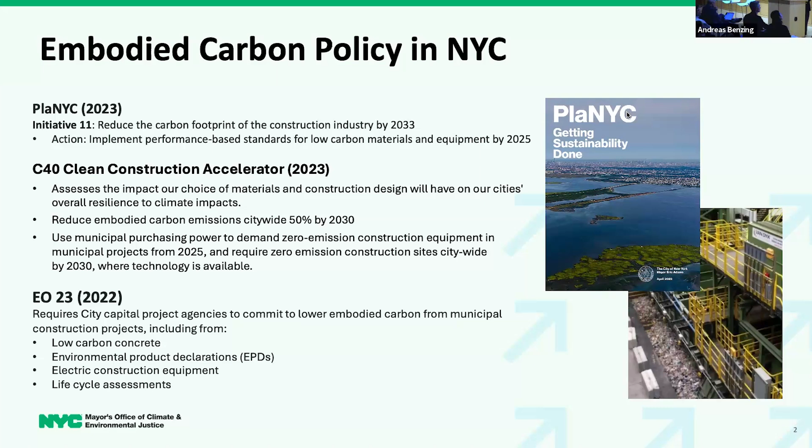Then, sorry to skip around here, but in PlaNYC, the city's strategic climate plan released in April of 2023, we had an initiative to reduce the carbon footprint of the construction industry 50% by 2033, with a specific action embedded within that plan to implement performance-based standards for low carbon materials and equipment by 2025, which is just around the corner. And then finally, I really wanted to highlight, and I'll go on to the next one, the C40 Clean Construction Accelerator.

Some of you in the room may be familiar with C40 and their clean construction program. They've been really helpful with us in capacity building within the city mayor's office side to help us develop North Star goals and how to assess the way our material choice and our construction design will impact our overall resilience to climate impacts.

So I've highlighted a few of the commitments here. There's a whole slew of them, and you can find them all on our website, nyclimate.nyc.gov. But really, it accelerated our commitment as laid out in our strategic climate plan, our 50% reduction in embodied carbon commitment, moving it from 2033 to 2030. And that's very ambitious, and we understand that.

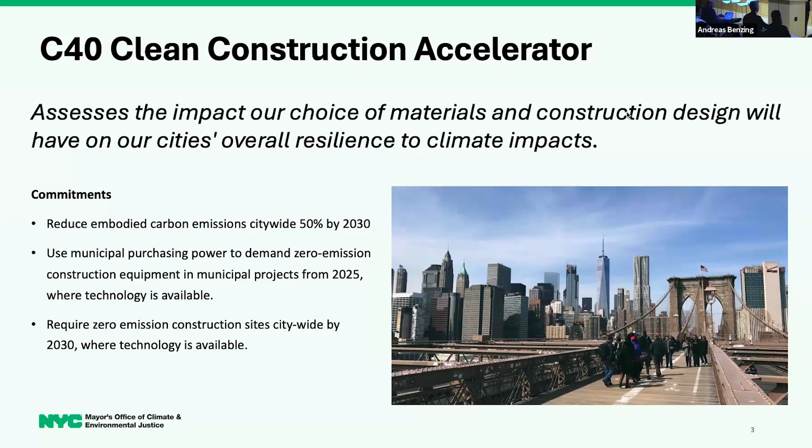Another initiative I wanted to highlight here is the use of municipal purchasing power to demand zero emission construction equipment from 2025 for municipal projects wherever the technology is available. That's something we're also doing research and undertaking this fall. And then finally, on the subject of zero emissions construction sites, we want to try to push to mandate that to be a citywide requirement by 2030, wherever that technology is available as well.

So I'll go through the elements of the executive order bit by bit and where we stand on implementation. For low carbon concrete, we've really seen a shift to performance-based specifications from this kind of prescriptive concrete specification that you traditionally see. We see that as really best practice based on conversations we've had with industry stakeholders.

I want to highlight our Department of Environmental Protection, which just this August released the city's first low carbon concrete specification, which is publicly available if anybody wants to look through it. We know our other city capital agencies are not far behind in releasing their own low carbon concrete specs—DCAS, DDC, Parks, etc. They're really all working on this, and we expect their specifications to be released this fall and winter.

I know there's been a lot of talk of innovations here at this conference. Really the one we see most developed so far in New York City is the use of ground glass pozzolan as a supplementary cementitious material, as opposed to fly ash or slag, which are fossil fuel byproducts. We've been working a lot with our Economic Development Corporation on this, and we have research with Stony Brook University looking at marine applications of ground glass pozzolan in concrete, as New York will need to pour a lot of concrete to become more resilient to coastal flooding from climate change.

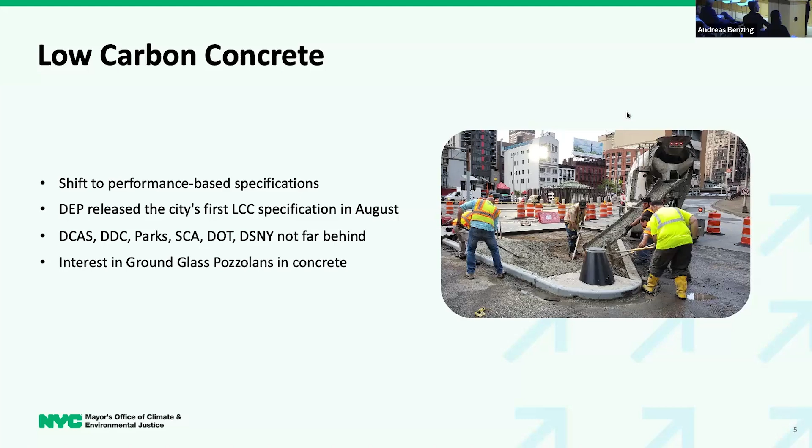Moving on to environmental product declarations, I know these were also mentioned quite a bit today. Our EPD guidance was released in January of this year. We've assigned our applicable projects pretty broadly, letting each agency decide what projects this element of the executive order applies to. So we're saying any construction project awarded by a city agency subject to the executive order using concrete and steel needs to request environmental product declarations wherever possible.

You'll see the covered construction materials here, focusing on both ready mix and precast concrete, which was a recommendation from industry stakeholders to push the envelope beyond ready mix into the precast world. On the steel side, you'll see a whole slew of different steel materials we're looking to gather accurate data on. If an EPD is not available, that's okay, but we want agencies to ask their suppliers why, and help build that capacity from the inside.

We're also encouraging agencies to provide EPDs for other materials not listed here. We know there are robust EPD ecosystems, for example in the finishings industry, but we couldn't necessarily require those just yet. We want to see what EPDs are on the market in New York City and what's being used in capital projects before we require them beyond these two.

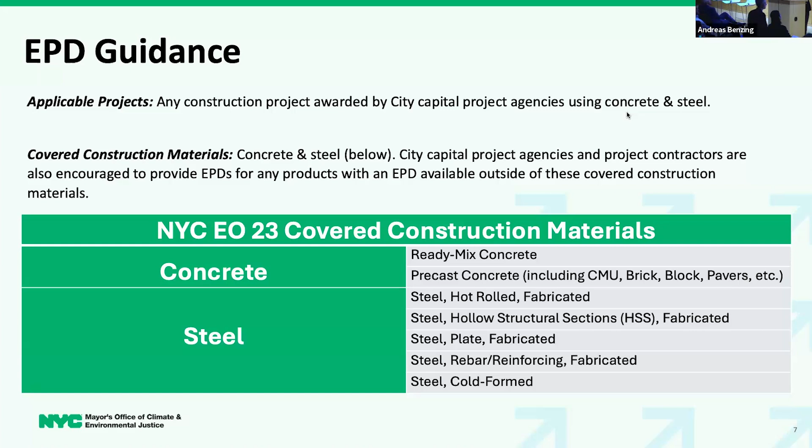Just a quick shout out here—I know Katie Poss from Building Transparency spoke earlier today, but we are using the EC3 tool, and she's been a wonderful help to us in creating capacity within our city capital projects. This is a screenshot of the EC3 tool, which has been helpful to us in developing the data infrastructure we need to further expand our EPD requirement.

We're trying to calculate or cover the quantities of construction materials, understanding whether or not there's an EPD for that specific material. We're linking to the specific EPD so that if we wanted to take a deep dive into a project, we could see it. EC3 also has a wonderful component where there's a how-to-get-an-EPD section that we found could be very helpful.

So if a contractor or agency project manager is interfacing directly with a supplier and they don't have an EPD, they could go to this section within the EC3 tool, giving that contractor or manufacturer the tools they might need to get started on their EPD generation process.

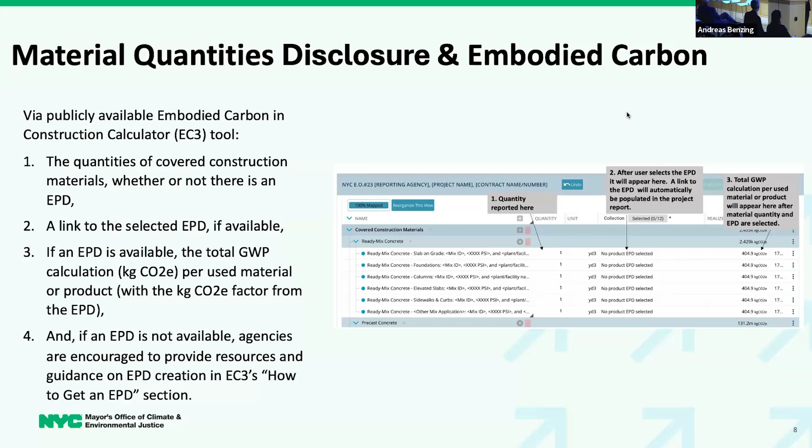This week for our office has been a really big week for electric construction equipment, and I know that might not be the general focus of this conference, but I wanted to highlight this as a challenge for us and something we've really taken on. We know there are significant challenges to getting electric construction equipment on sites here in New York, both newly available equipment and ones that are retrofitted and fit out.

We know that in certain cities around the world—our colleague was in Oslo, Norway just last week—almost 80% of their construction sites are fully electric. There's infrastructure around the world for these pieces of equipment; it just needs significant love and attention in New York. We know there's also cost, both upfront and lifetime cost issues, and a sincere lack of communication between cities, government agencies, and stakeholders within the electric construction equipment community.

So we can't accurately specify electric construction equipment just yet because we don't know what's on the market, and we don't know what's coming over the next year or two.

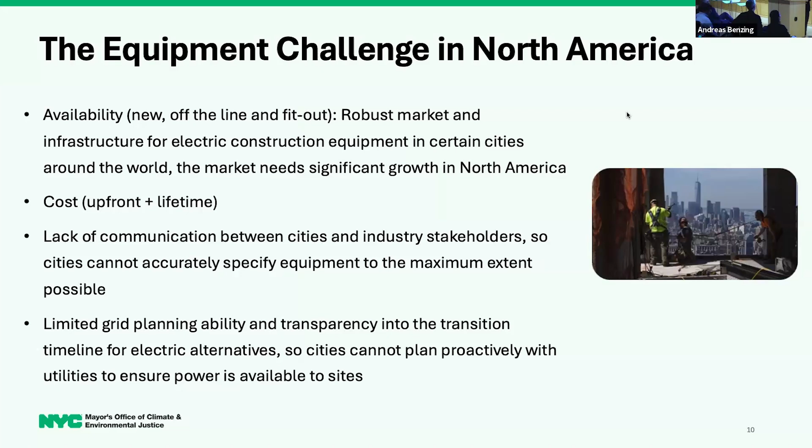So with those challenges in mind, we have just launched the North American Electric Construction Coalition. If any of you are from a New York City-based company or even anywhere else in the States, I really encourage you to check out our website. I regret not having our QR code up here, but please reach out to me after the panel. Together with 6 other cities, New York City is launching this coalition in order to help us spur the market and develop this market in North America. We know that cities, when they work together, have a real ability to drive impact and move markets.

Collectively, as a coalition, I think we spend over $15 billion on capital construction every year. So really hoping that this coalition, and it's by no means closed, but really hoping that this coalition will help start this conversation here in New York. We also have private sector partners a part of this coalition, and you'll find that on our website. But anybody from a private sector firm to an institution to a city, we really encourage you to get on board and start having these conversations with manufacturers as the year goes on.

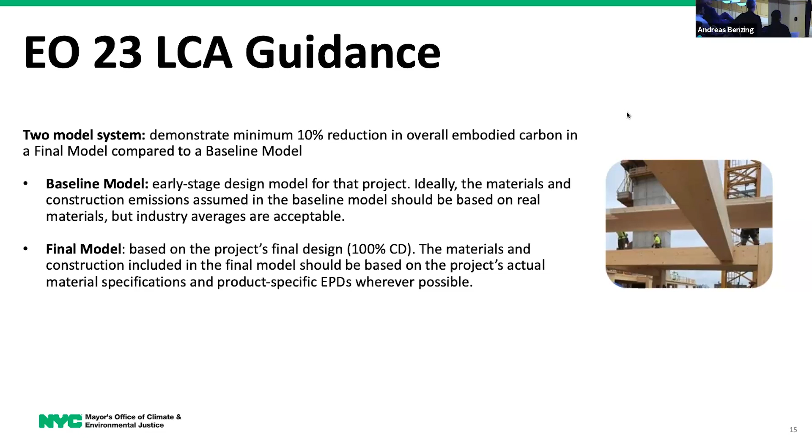And this is what I meant to have before. You can see here, this is a graphic from the Carbon Leadership Forum, but we're targeting this kind of yellow-orange embodied carbon piece here.

We're not looking quite yet at whole life carbon, synergizing the operational standards we have on a city level with the embodied carbon standards we're starting to build out. But we are requiring the upfront carbon stages—A1 to A5, B1 to B5, and C1 to C4. And maybe pertinent to you all in this room is optional reporting on the benefits of biogenic carbon or concrete carbonation in our reporting template.

You'll also find on our website that we took an approach to break apart the life cycle assessment that a tool spits out into its specific components by life cycle phase. By separating out the biogenic carbon piece, we can get a better understanding of the benefit of these biogenic materials so we can make more accurate policy later on. That exercise will be critical for supporting the development of the mass timber industry, and all the other amazing innovations we've heard about today.

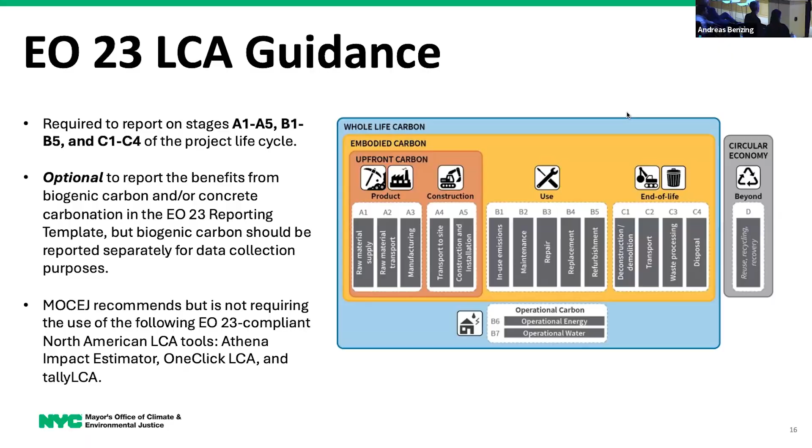We also don't weigh in on which specific LCA tool is better than another, but we know of the tools that cover the A1 to C4 section. The main ones in the North American industry are Athena, OneClick, and Tally. Just wanted to point that out.

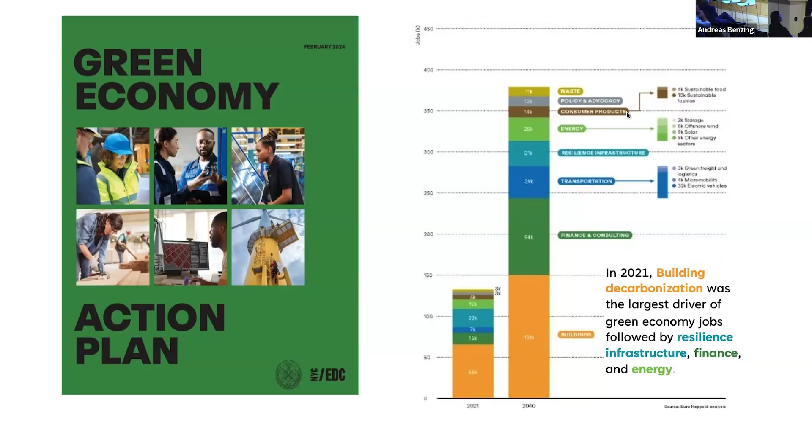To give some quick background—I know a lot of folks here know these facts and figures—operational carbon is something we target through other programs, including 80 by 50, a partnership with New York City DCAS. But with the circular construction guidelines, we're really focusing on embodied carbon, which is 30% of carbon emissions coming from buildings.

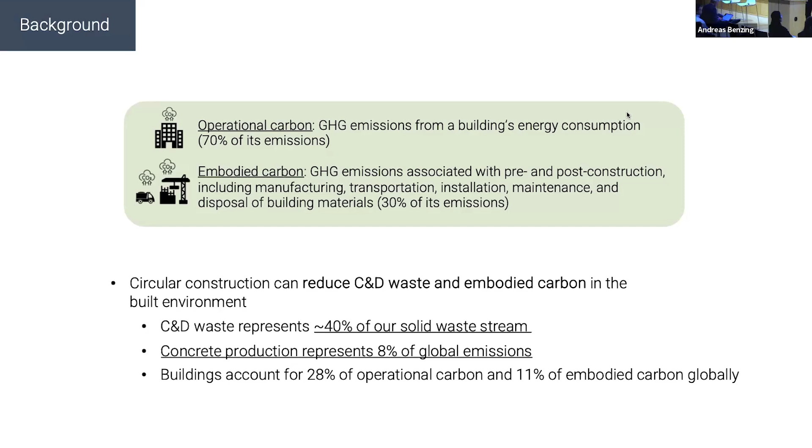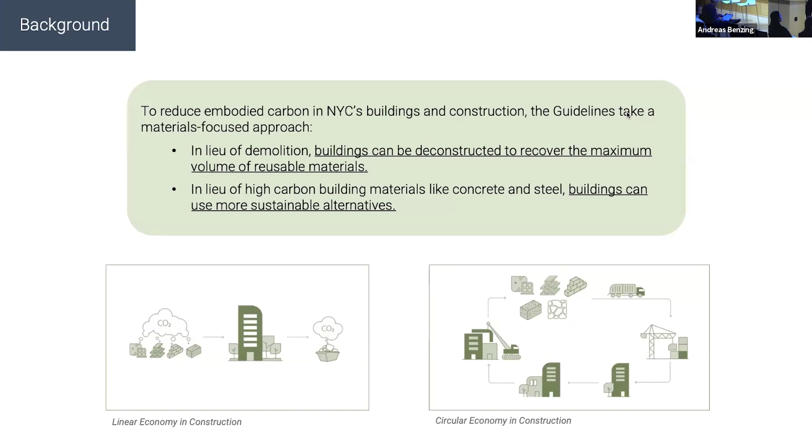I think we're all familiar that construction and demolition waste is a big part of the global solid waste stream, and concrete production and steel production really contribute to that. So our guidelines take a materials-focused approach: in lieu of demolition, deconstructing buildings, and in lieu of high carbon building materials like concrete and steel, buildings can use more sustainable alternatives.

I want to go through a few projects before we jump into the guidelines to show how we led up to this. Red Hook Library, which is under construction right now, is one of our earlier examples. In this project, at the top you can see the existing library, and at the bottom a rendering of how it's going to turn out.

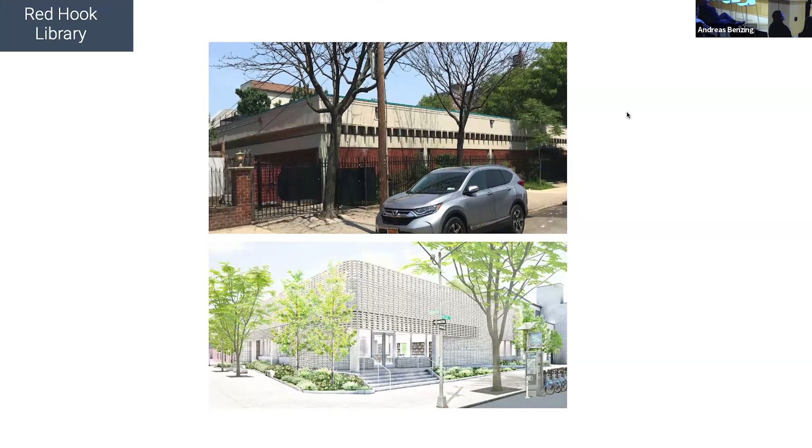We sought to use as much of the concrete structure as possible. This is in Red Hook, which many of us know is in a floodplain, and we had to raise the floor level of the building roughly 18 inches, then have a flood wall beyond that around the building, another 18 inches. So doing that, if you raise it up, you'd have a pretty low space between the roof and the floor. So we had to figure out a way to raise up the roof as well.

I wanted to show this because it's a great lesson learned from trying to implement circularity principles in a project, and that's where you have to find the right contractor. Without Urban Foundations and Engineering, we couldn't have done this. It wouldn't have made sense financially, and it would have been too long to try to figure it out.

Urban had already raised a theater in Times Square 30 feet up in the air, and that theater weighed about 14 million pounds and had 1,700 seats. They had to do that without disturbing any of the delicate plaster work. So this project was a walk in the park for them to raise this double-T concrete roof up roughly 5 feet. That accounted for the roughly 3 feet from the floor and the flood wall, plus some more for our ceiling heights and the new design of the library.

You can see on the top right the large lateral braces with Urban written on them, and the beginning of the jacking process of raising this roof. Then the photo on the bottom, as well as the zoomed-in version, shows where we raised up that roof. They did this really quickly, over the course of about a day and a half.

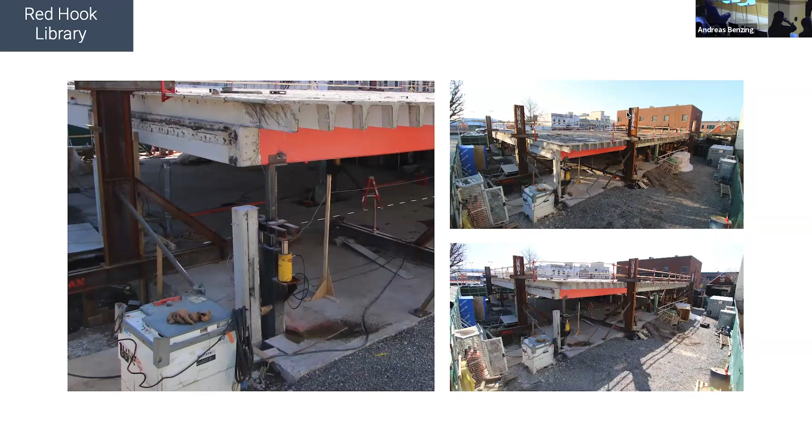Again, the collaboration with the right contractor at the right time was key to this project. Some other folks at EDC are really trying to build up the industry so that we don't have to rely so specifically on this, but at this time, that's really what we're looking for whenever we try to implement these strategies in our projects: find the right one.

This is another one of many projects we have, but these are two kind of fun examples I wanted to show. The Bronx Museum of the Arts is another project where we are redefining the face of this museum along Grand Concourse in the Bronx. This is a side facade over on 165th Street.

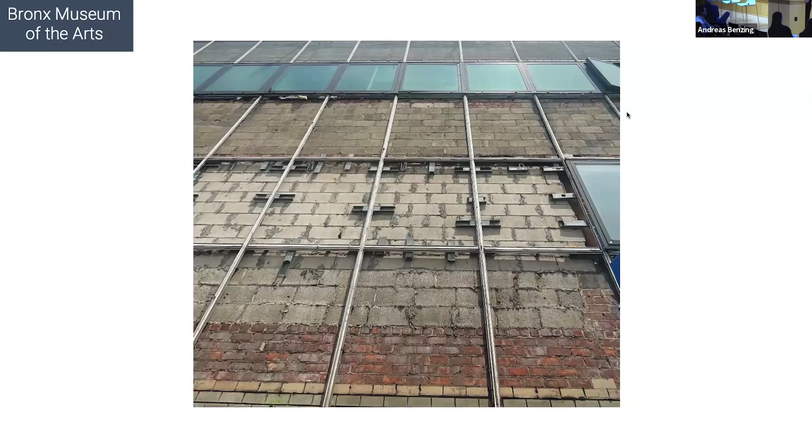We wanted to expose the building. It had been built and rebuilt over the course of time, so we took off these metal panels to sort of expose the history behind it. We recently pulled the panels off and found this, which may best be described as a face only an architect could love. But the design team and myself are thrilled with this challenge, and we can't wait to unveil the final result.

So I'll jump into our actual guidelines here. After some small successes on various projects, we really wanted to formalize the process and maximize the reuse of materials on our projects and reduce embodied carbon. Through some of the ideas I was talking about at the beginning, myself and a few colleagues—shout out to Gizem Karagoz, who is here with us—had the idea to put together these guidelines for ourselves more than anything else. I think sometimes that's where the best products come from.

However, we did write them in a way that could be implemented by public or private agencies or building owners. We wanted to stand on the shoulders of other resources like the AIA's Net Zero Waste Guidelines and Arup's Circular Buildings Toolkit, and take a different approach to create a project delivery process, really identifying the roles between the owner, designer, and builder to build materials reuse into the project, with a clear process and accountability built in.

So the guidelines really have three main aspects: goals, strategies, and deliverables. Our goals—we thought about these a lot, and looked at other municipalities across the world to find out what's achievable but also aggressive. So we have a 75% minimum construction and demolition material diversion, hopefully via reuse, ideally on site, or recycling.

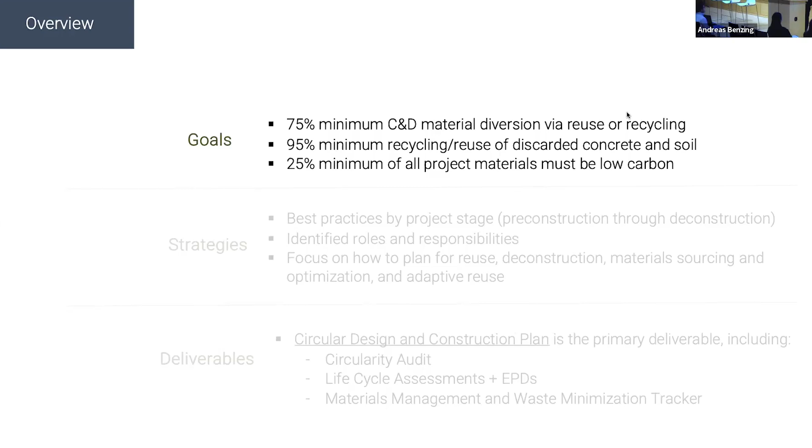So strategies. Again, we wanted to differ from the AIA and ARUP and others. It's not design-based strategies, but really process-based strategies, so that owners and architects who don't have experience in circularity can pick these up and know how to move forward.

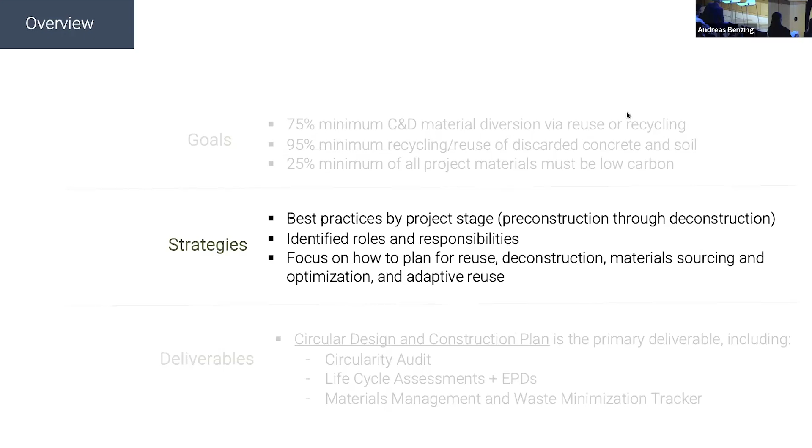So looking at best practices by the project stage, from preconstruction all the way through deconstruction. Again, identify those roles and responsibilities, not just within the three basic parties of owner, designer, and builder, but the project managers and individual roles between them. And then focus on how to plan for reuse, deconstruction, material sourcing, optimization, adaptive reuse.

And our deliverables. So our key deliverable is a circular design and construction plan. That has three basic components. The circularity audit, understanding what's on site and what materials we have to work with. The life cycle assessments and EPDs, so really understanding our impact. And then what we call the materials management and waste minimization tracker. This is about accountability, going from the circularity audit to what we have on site and understanding where all of those materials are going to go, and where we're tracking against our goals.

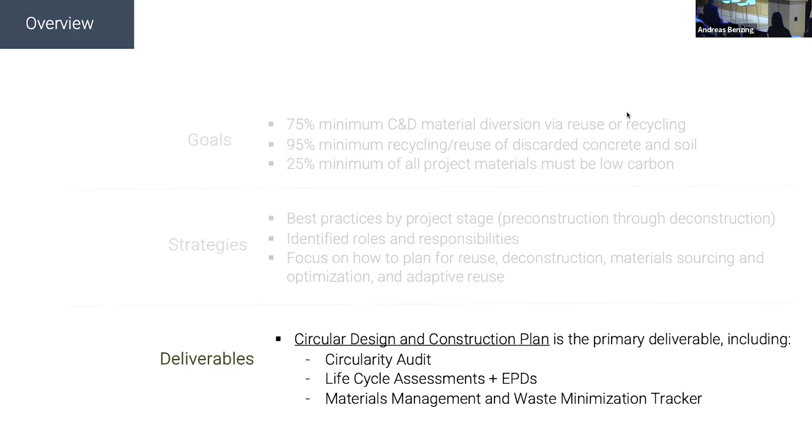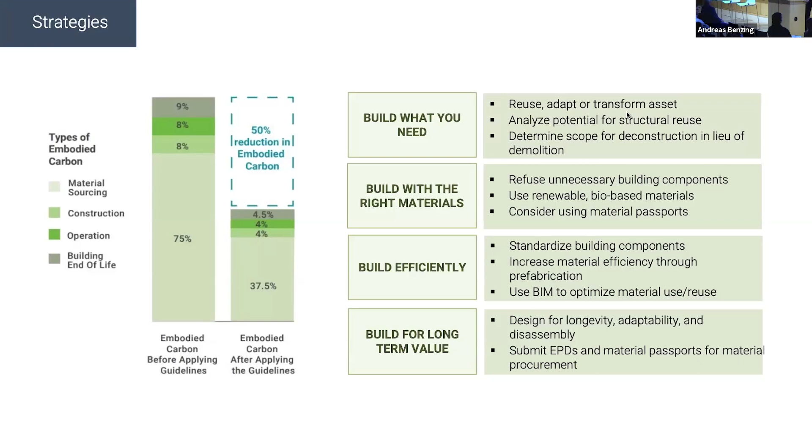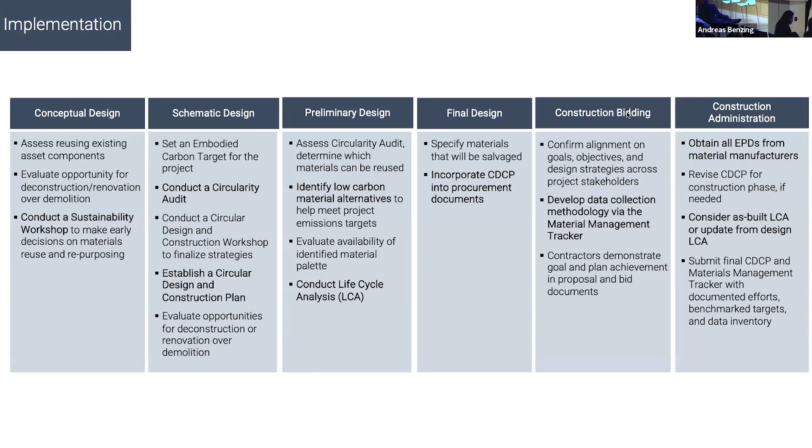I'm not going to go through each one of these points, but want to illustrate the process that we've laid out across the project life cycle. Broadly, we're going from understanding our material inventory, creating strategies to maximize reuse of materials, quantifying our impact, creating the specs and contract documents to describe the work, and developing a strategy to competitively buy out the work. And then at the end, enforcing accountability in the execution of the work.

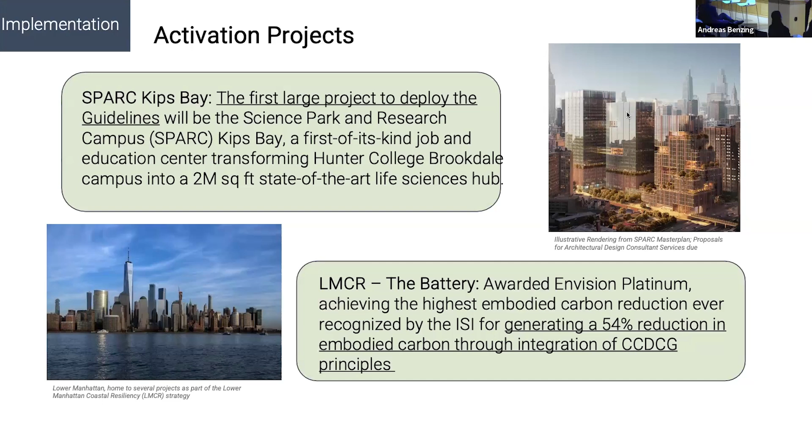So I wanted to give a sort of sneak peek and show what's coming out of our implementation. We recently started design on SPARC Kips Bay, and our design team - this is what's coming out of our circularity audit.

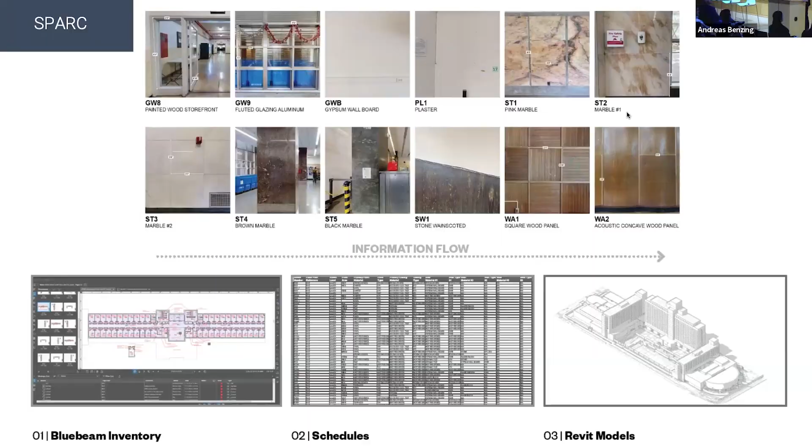So I'll end it here and just mention, we're going to be doing everything we can to continue the unique stories of our buildings. Everybody in this room agrees our survival depends on our ability to thrive in harmony with nature. And every brick, every board, every beam, every material is a piece of our planet's future, and we want to put them to use. Thank you.